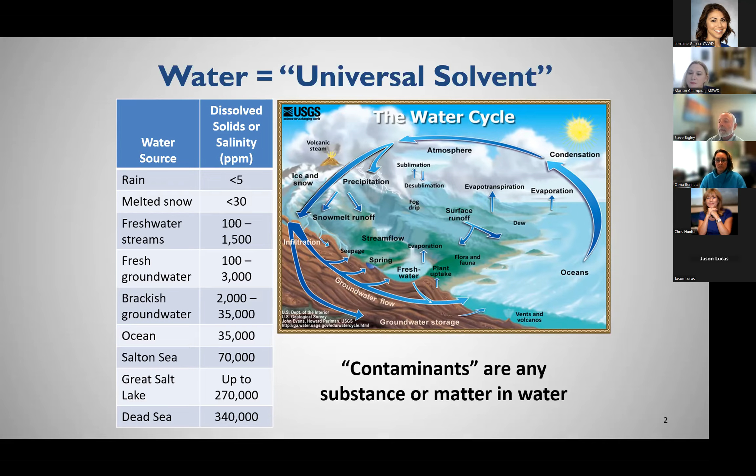I'm happy to report that our tap water is primarily H2O, 99.97%. That little sliver represents all of the things dissolved in H2O, and it's typically minerals like calcium, magnesium, sodium, potassium. But we hear a lot about that part which represents about 1 10,000th of 1% of the water, which is those things in the news like arsenic, lead and copper. So we're going to talk a lot about those things.

In order to ensure our water is safe, we have lots of tools, and from doing research like that we do in our own state certified laboratory, there's a photo there to the right.

Lots of contaminant monitoring. How do we protect those sources that we use for drinking water? State and federal regulations are that key way of measuring and ensuring consumer confidence that we are providing safe water. We implement water treatment when necessary. We do surveys to ensure the safety of the water and the water system exists. How we construct the water system also helps protect and preserve safe water quality.

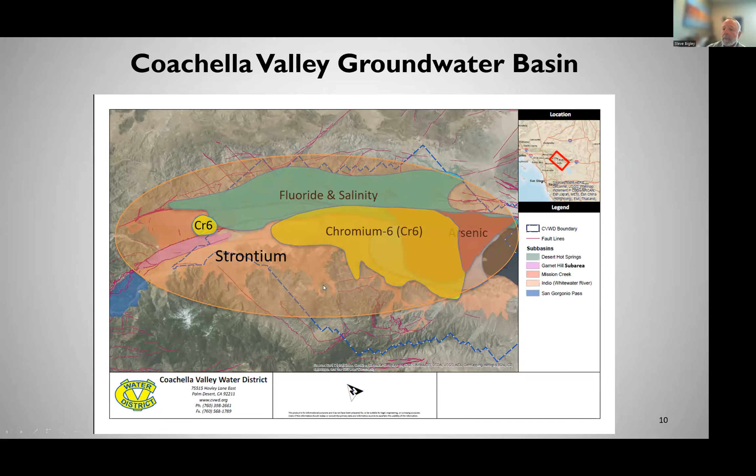So let's take a look at the chromium. It really serves as a good example for the state process for drinking water regulations. Chromium is abundant. It's the 21st most abundant element in the Earth's crust.

It occurs in two oxidation states. Chromium-3, you typically find that in more solid forms. It can also be dissolved in water, and chromium-6. It just has to do with the number of electrons, and it can move back and forth between them depending on the type of environment. If you're in a reducing environment, antioxidants, you'll have a chromium-3 version. If you're in an oxidizing environment, you'll have chromium-6. In groundwater, we find it not just in our area but throughout the state - it primarily occurs as chromium-6.

Chromium-3 is an essential nutrient. It's in your vitamins. We use it to produce insulin, regulate our metabolisms.

So the sources - natural deposits. Those fault systems, again, very important. Where do you find the geology that has higher concentrations of naturally occurring chromium? Along the margins of faults. So we have a really big margin, it cuts right down the middle of the valley. We have these natural minerals that have chromium.

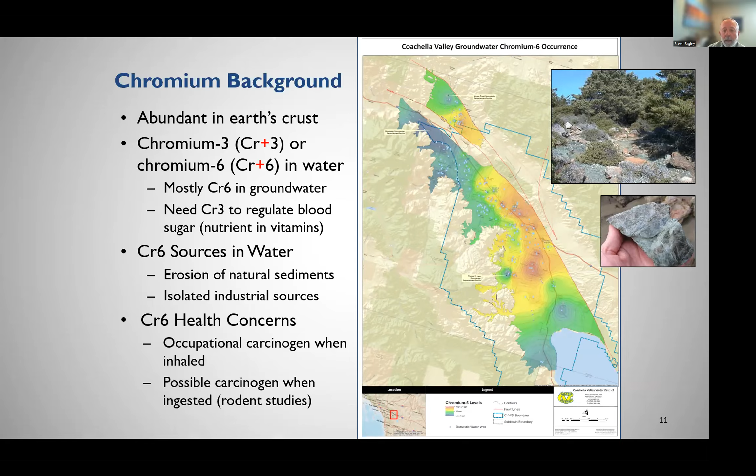We've known a lot about chromium-6 from inhalation. A lot of occupational exposures were studied early in the 70s for people working in chromium ore facilities. We knew it's not healthy to inhale, but when it enters our digestive system, it goes through our stomach, which is a great reducing environment. We're designed to reduce chromium-6 to chromium-3 because we need it. So it was never a concern from ingestion until some rodent studies came up.

So it's actually surprising that they saw no increased mortality in the rodents, both rats and mice, that were used in these studies. But they did see an increased number of tumors that formed in the small intestine.

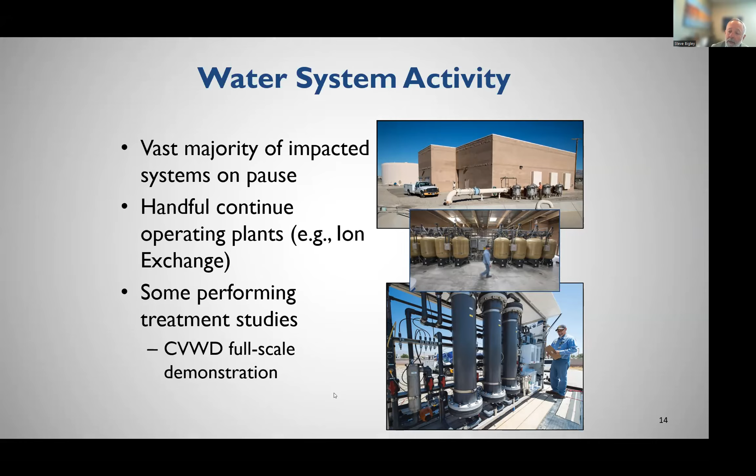So we were on track to move forward with that project when the state withdrew their standard, but we didn't stop looking for a better way. So we continued with our state certified laboratory doing treatment studies. There's an example to the right, ultimately landing on a better option.

We did work on using a very well-known antioxidant or reductant, vitamin C. We did a lot of work on vitamin C. It works well for an in-home product. You can easily add 200 milligrams of powdered vitamin C to a gallon, and you'll immediately reduce the chromium-6 level in that gallon of water. But it wouldn't work out in our water system.

But we did identify another common antioxidant that's already an approved drinking water additive. It's used to protect pipes, and that's called stannous chloride. And we did lots of testing in our lab, a much better reducing agent than iron and vitamin C.

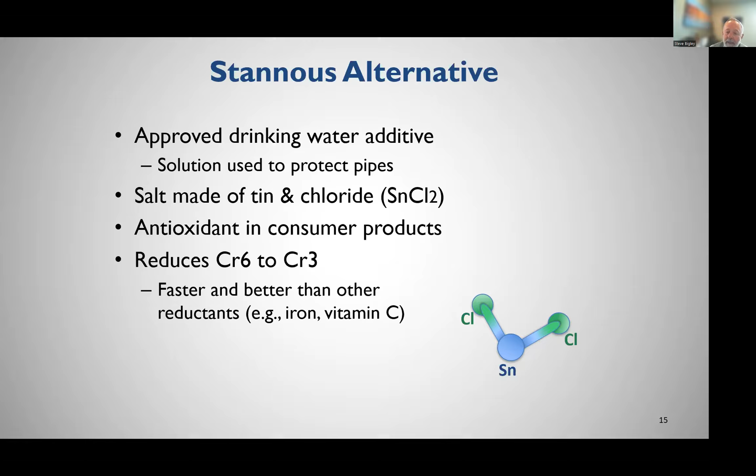And we ultimately developed a full-scale demonstration treating an entire water system, the one north of the San Andreas Fault that we serve, about 3,000 homes along the Dillon Road, if you're familiar with that area, the Sky Valley, Indio Hills area. And it was an ideal system because it's about 15 miles long, and the wells are all located on the far northern side.

And so it provides a long time to test the reaction and ensure whether or not this would work in a water system. And it had good amounts of chromium-6 so that if we could demonstrate it in this system, it would meet all of the other wells that we have that might need treatment.

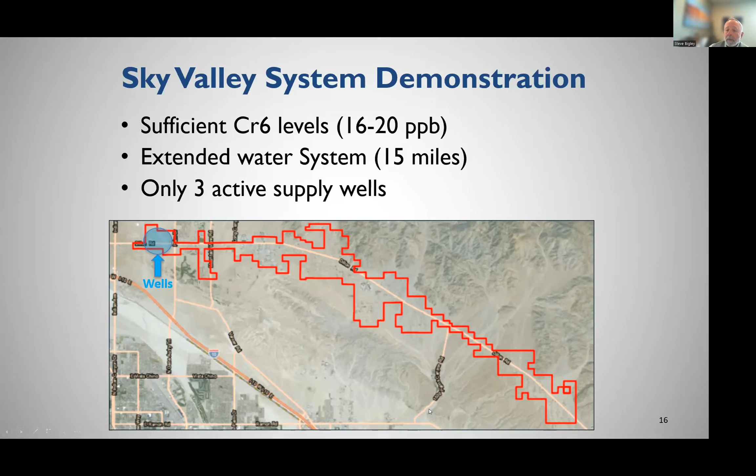So it's really simple. We add about half of one part per million of stannous chloride solution. You get an immediate reduction of chromium-6 to chromium-3. Remember, chromium-3 is that essential nutrient. And then we add about the same amount that we've always added of chlorine, about half a part per million of chlorine.

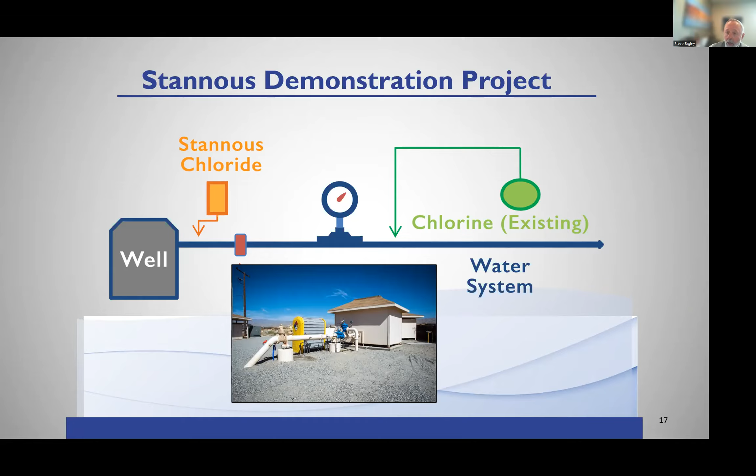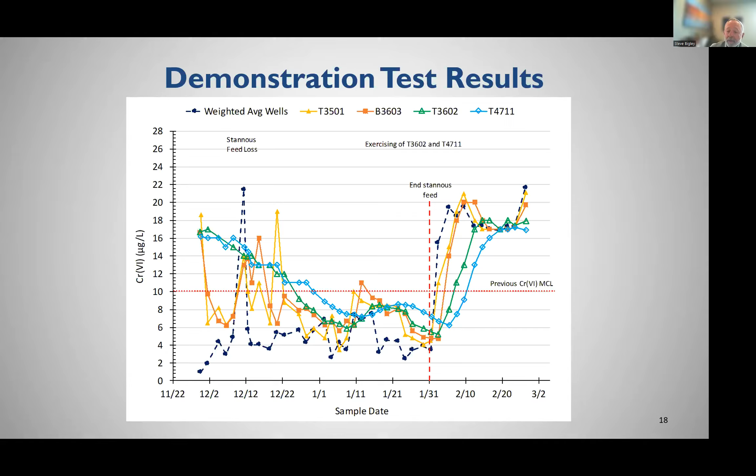The benefits: it's much more cost effective, and it doesn't produce any waste products. Those hazardous materials that are developed have environmental concerns, but there are none of those here. There's no visual impact at these well sites, which are often in our neighborhoods, and that's very important. It also helps protect pipes, since it's an approved drinking water additive. In areas that have lead problems, we don't have one here, but it would prevent lead from leaching into the water, so that's an additional protection. And it didn't change the taste, smell, or look of the water, so it was a real success.

We have submitted our application to the state. They have it to allow us to implement this. We'll start in the same water system where we did the demonstration, and then move over to our large water system. Of course, all this is hinged on what the state comes out with as far as that drinking water standard. So I just wanted to give you that one example, and I'm certainly available to answer any questions you might have.

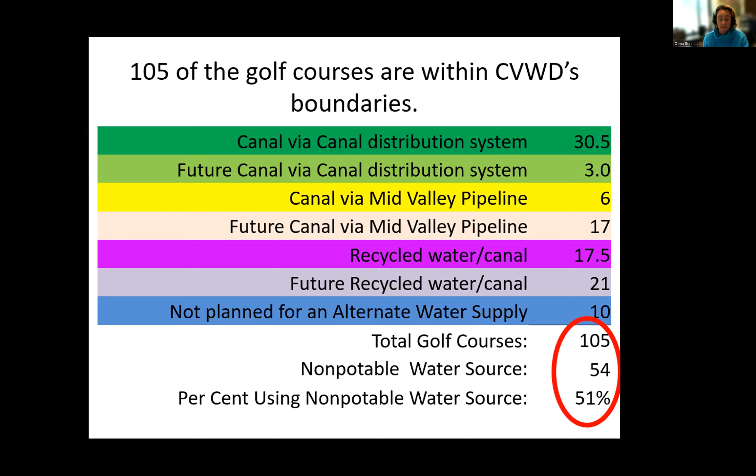I know you know this, and any other time of year I'd say we don't get much stormwater, but we had sprinkles today. Typically we have 3 to 4 inches of rain here in the desert, so we can't rely on stormwater for irrigation, not only on golf courses but even in our own yards. As we know, the other water source could be groundwater—a well owner would pump groundwater from the ground and apply it to their golf course or property. The third source would be non-potable water.

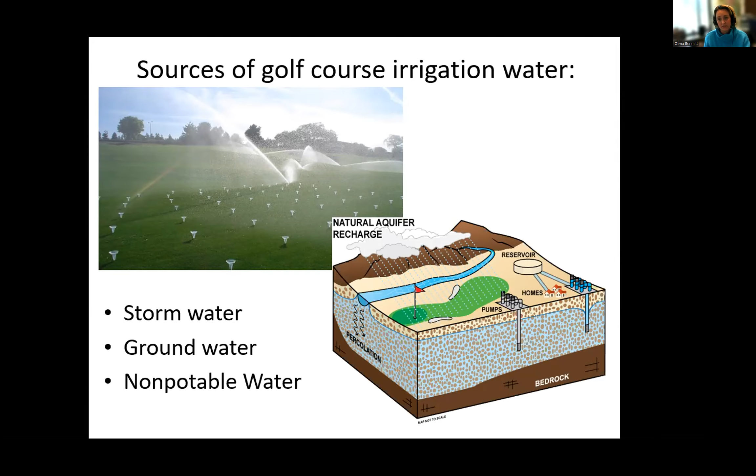So how much water—I always get asked how much water a golf course actually uses. It really depends on where they're located and the type of golf course it is. This is an evapotranspiration map, available on our website, cvwd.org, and you can see there are 5 different zones in the valley. If you're a golf course in zone 1 or 2, you might only use 300 to 500 acre feet a year for irrigation. But if you're out in the wind belts, like zones 5 or 4, you're going to use quite a bit more, maybe 1,400 acre feet per year.

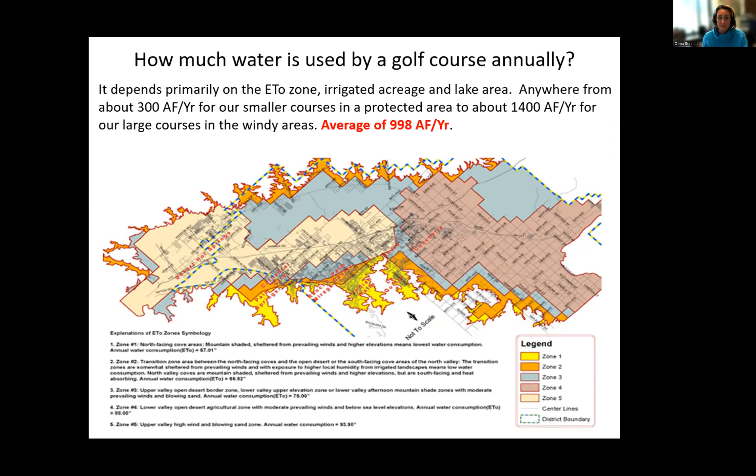The average last year for all of our golf courses was 998 acre feet—that was the average for the 105 in our service area. So to make the math easy, we'll say that's an even 1,000 acre feet a year for a golf course. Because there are 120 golf courses in the valley, that means potentially 120,000 acre feet of well water could be pumped from the ground, but with the non-potable program, that doesn't happen.

What's the big deal? Well, the whole point of this is to preserve our groundwater, because in the past we've been in an overdraft situation, meaning we're pumping out more water than what's being replaced.

We work with the USGS, and we've been working with them since '96. This graphic on the right is showing uplift and subsidence, and where it's red, that's areas of up to 1.4 feet of subsidence.

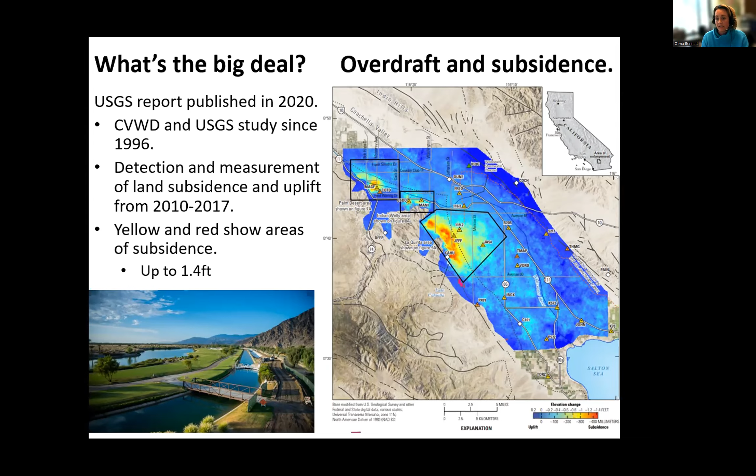What is in those red spots? You might be tempted to say golf courses because we're talking about golf courses, but really that's where most of us live. That's where our businesses are, that's where we work, resorts, restaurants, shopping—everything is mostly in those areas, so we see a big hit on those areas.

The district's been replenishing the groundwater since the late 60s. When we replenish the aquifer, we bring imported water in and put it into a pond and it percolates down. That makes the water available for pump well owners, whether it's a golf course or even the district ourselves.

On the other hand, an opportunity for us is to do in-lieu recharge. We have 38 golf courses that are in line for in-lieu recharge, and that's when we substitute the groundwater use with non-potable water use.

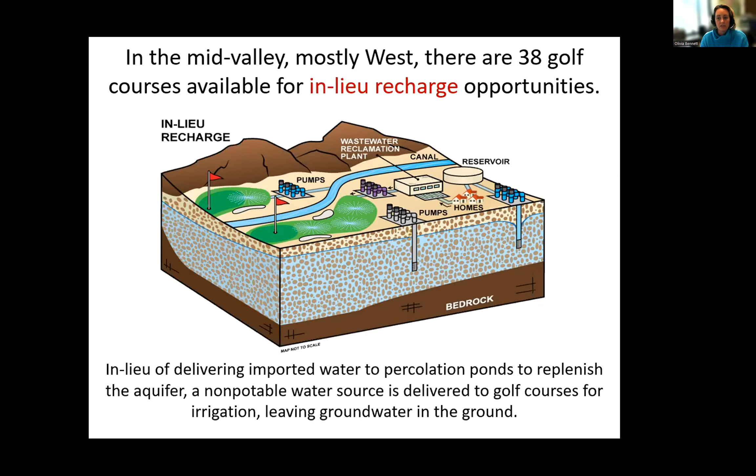This icon is showing when we pull water off of the canal and pump it to a golf course, or we may collect wastewater from homes, treat it, clean it and disinfect it, and then provide it to a golf course for irrigation. You'll notice those golf course owners' wells are off, they're grayed out, and that's the goal.

It's one of the goals of our water management plan. The water management plan was developed to prove that we're going to be able to meet our current and future demands and have sustainable water sources.

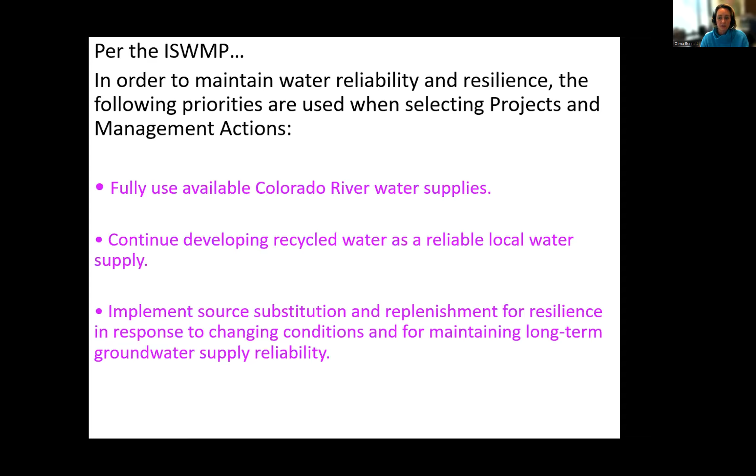As it pertains to non-potable water, we said in the water management plan that we're going to fully use available Colorado River water supplies, continue developing recycled water as a reliable local water supply, and implement source substitution programs—basically where instead of groundwater, we're going to provide non-potable water. And of course, water use efficiency across all sectors is important.

Strictly pertaining to golf courses, they're to focus on conservation and utilizing non-potable water for their irrigation source in that plan. The golf courses were aware of this and they wanted to participate.

In 2013, they approached CVWD and wanted to develop a task force, the Golf and Water Task Force, and we worked with them to develop a mission statement. In that mission statement, they addressed that they want to institute some conservation measures and expedite the use of non-potable water. So they are on board with the non-potable water program, aware of the water management plan, and they do want to participate in it.

I've said non-potable water several times, but now I'm going to tell you exactly what I'm talking about. The first type is canal water or Colorado River water, and a golf course would have access to canal water via the Mid-Valley pipeline or directly off of the Coachella branch of the All-American Canal, or from the canal water distribution system. The second type is recycled water.

We provide disinfected tertiary recycled water from our treatment plants to golf courses and for landscape and golf course irrigation. It's important to know that there are potable water sources and non-potable water sources, and we want to use potable water for potable reasons and non-potable water for non-potable reasons. That way, the primary source of water isn't groundwater—it can be non-potable water instead.

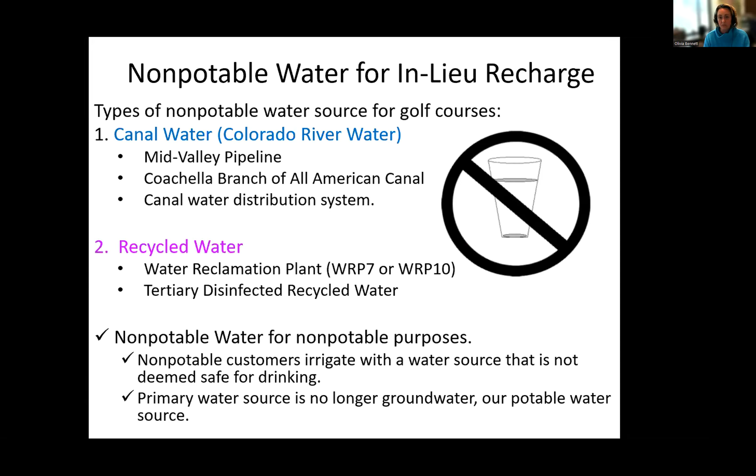So how are we doing?

In the East Valley, for our canal water connections last year in 2022, about 21,000 acre feet of water was used for golf course irrigation, which was 74% of their total irrigation demand. Our goal to have all 33 golf courses in the East Valley connected would be 33,000 acre feet a year or so. We've got 3 more golf courses to connect out there, and a little bit of improvement to do.

However, in the Mid-Valley area for non-potable connections, remember those purple courses from that aerial map, last year it was over 24,000 acre feet, which was 93% of their total irrigation demand. Our goal, because there are so many more golf courses to connect in the Mid-Valley, would be up to 61,000 acre feet per year. So our goal, and what we require for a non-potable water golf course to meet, is 80% of their total annual or fiscal year's irrigation demand with non-potable water.

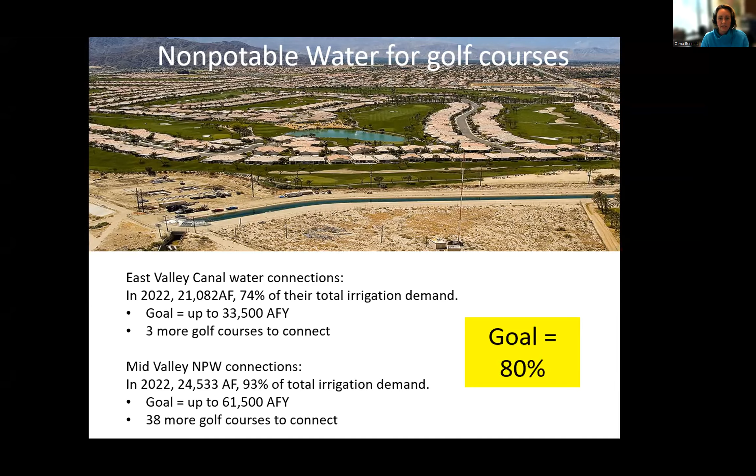So if you add those two numbers or percentages together, it's about 83 or 84%. So across the board, they're meeting the goals.

For canal water, I think you've probably covered this, but just wanted to give you an idea where it actually comes from. This is an aerial of Southern California. Over on the left would be the ocean, and on the right would be Arizona. Between us and Arizona is the Colorado River, the blue squiggly line going all the way down. Off of the Colorado River at the bottom is the All-American Canal in blue going left to right, and shooting straight up off of that is the Coachella Canal, the Coachella branch of the All-American Canal. It's 123 miles long, and as you see, it kind of fish hooks there towards the end, and it terminates at Lake Cahuilla.

Well, within that fish hooked area, we have 1,300 customers, and 30 of them are golf courses.

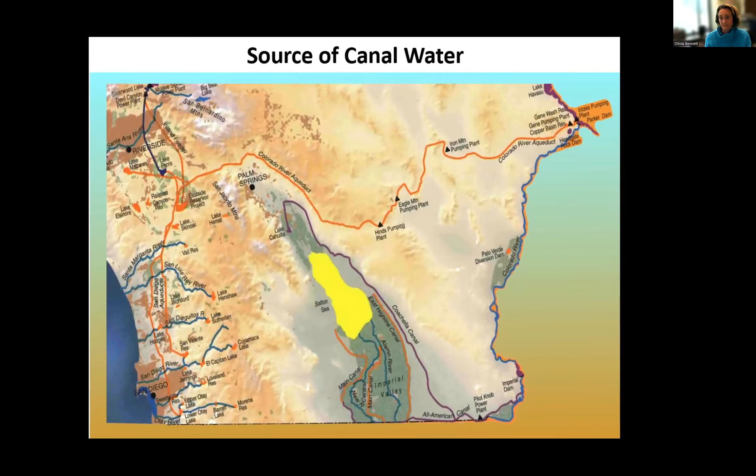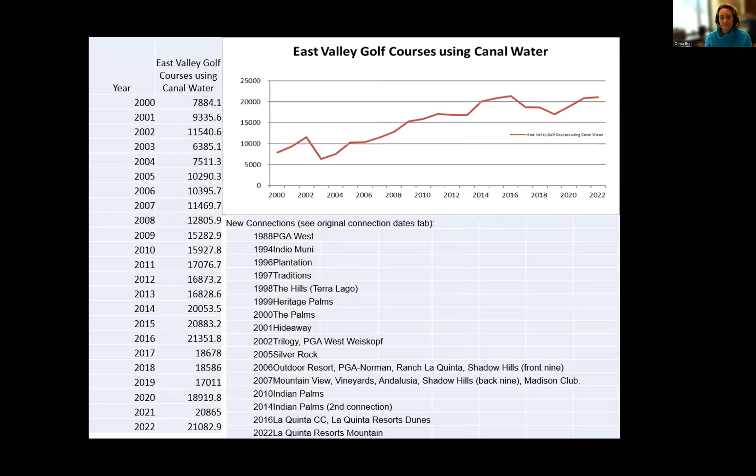The next water type is recycled water. CVWD has been in the recycled water business since 1968. When we took over the domestic water system serving Palm Desert Country Club, they had a package plant there that was treating wastewater to secondary effluent, and they were using that to irrigate the golf course there. So when we inherited the domestic water system, we inherited the wastewater treatment plant, and CVWD was in the sanitation business. Today we have 2 wastewater treatment plants that provide disinfected tertiary recycled water to golf courses and for landscape irrigation as well.

What is recycled water? It's municipal wastewater that's collected from homes and businesses and receives a high level of treatment at a water reclamation plant. We monitor those plants 24/7, and we collect water quality samples all day long. In fact, every day, every week, every month, every quarter, every year, we're collecting different types of samples to be tested to ensure that our permit regulations are met and that we can provide safe recycled water to our customers.

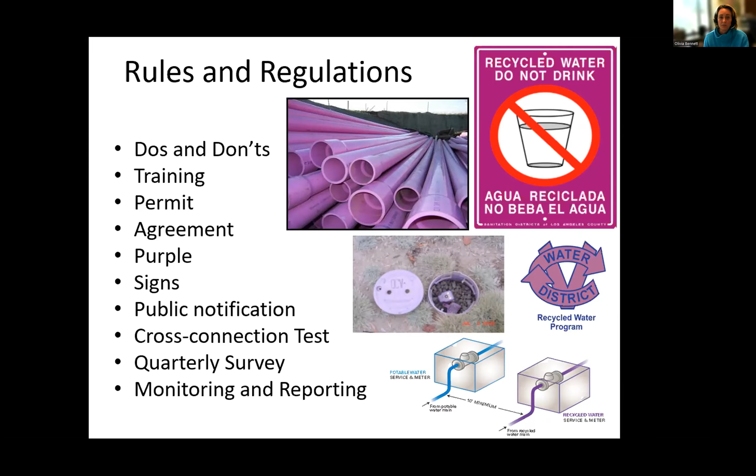And to prove that it's not connected to the domestic water system, we conduct cross-connection shutdown tests every 4 years. That's to make sure there isn't going to be any connection between the two water sources, so that it's not unsafe. We always go back every quarter — we're required to do quarterly surveys to make sure there's been no changes on the irrigation system. And then that monitoring, and other monitoring, we are required to report to the state what our findings are. It's a highly regulated water source, as Steve mentioned.

In the state of California, there are 43 allowed uses of recycled water that are approved, and I'm going to show you something here in a minute. I don't know if you have a printout of it or not, but we can get you one. There's a lot of uses listed on the left-hand side, and then the different levels of recycled water treatment. Remember, CVWD provides disinfected tertiary recycled water, and it's approved for pretty much every use that's listed there.

A couple of years ago, they did a survey of the state. They always update this survey, and they found that for the most part, the majority of recycled water is being used for in-stream flows. That's where we put water in the streams to make sure they can be used for recreation, or for plants and animals ecologically — their homes — and make sure they're safe for spawning or migrations and things like that.

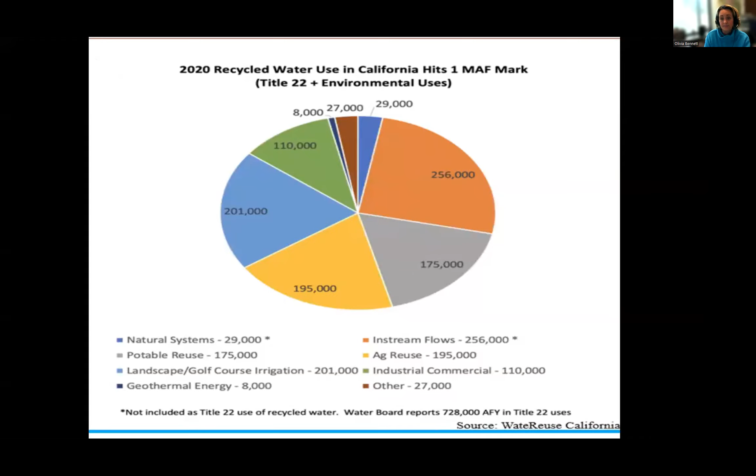The second highest use is golf course and landscape irrigation, and the third is agriculture. But at CVWD, we provide recycled water for golf courses, HOAs, and high school athletic fields. Even our buildings here at CVWD, the landscape around them uses recycled water. And in the near future, we do intend to provide recycled water for agriculture.

10 reasons why we provide recycled water here in the Coachella Valley: the Department of Water Resources projects a large statewide shortage, and groundwater is our drinking water source. We want to protect that. If the state comes in and doesn't believe that we're following our plan, they could adjudicate our groundwater system and put high regulations on what's allowed to be pulled out and what's not.

But as we mentioned before, in our water management plan, we said that we're going to provide recycled water because it's a reliable local water supply for irrigation. If we irrigate with recycled water, it saves groundwater. We want to prevent future overdraft of our groundwater, and that's what the in-lieu recharge program is about.

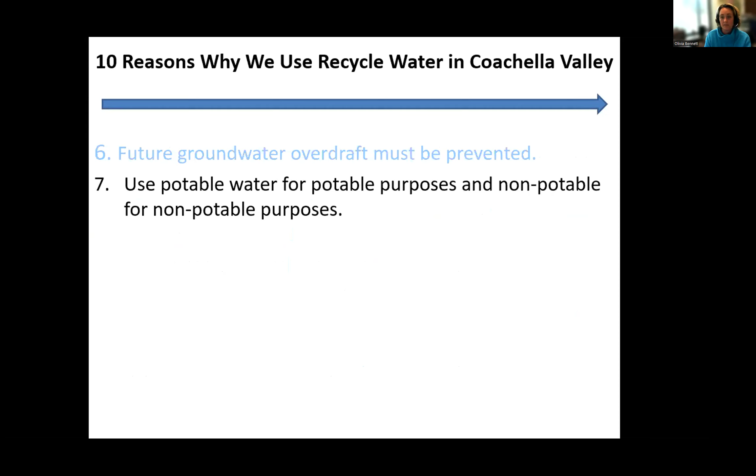Again, the idea is to use potable water sources for potable purposes and non-potable water sources for non-potable purposes. As you saw, there are 43 approved uses, and pretty much any non-potable water use can be served with tertiary recycled water. It's more economical than advanced treatment. There are areas in California treating recycled water to potable standards, but if we were to convert our treatment plant to that, it would cost millions and millions of dollars — so much more than what we are paying now to connect the golf courses, which are large end users and use a lot of recycled water.

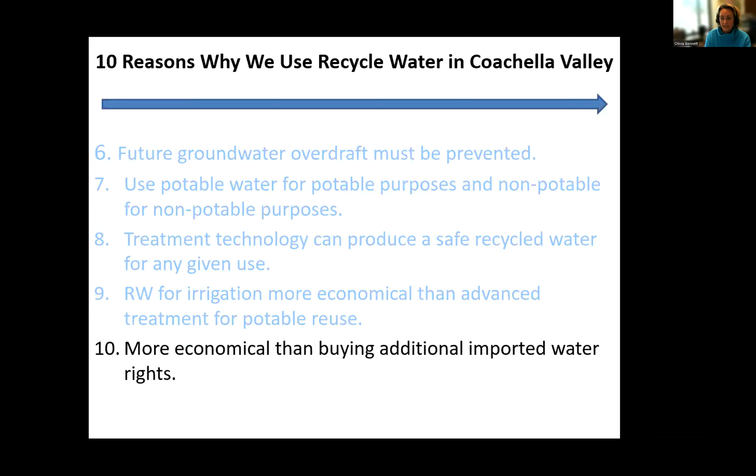It's more economical than buying additional imported water rights because those rates are very high right now. The problem with recycled water is that we run out. In the winter, there are a lot of snowbirds in the valley flushing their toilets, and a golf course's irrigation demand goes down. Then vice versa, in the summer, irrigation demand is high, but there aren't a lot of people here.

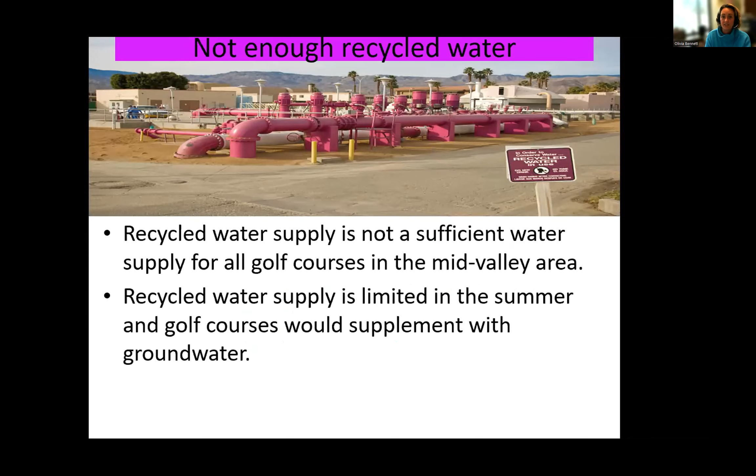So what we did was build the Mid-Valley Pipeline, and that supplements our recycled water supply with canal water. The Mid-Valley Pipeline is a 54-inch pipeline that's in the stormwater channel and brings canal water from Indio through La Quinta, through Indian Wells to Palm Desert. It's about 6.7 miles long, and it supplements our recycled water supply.

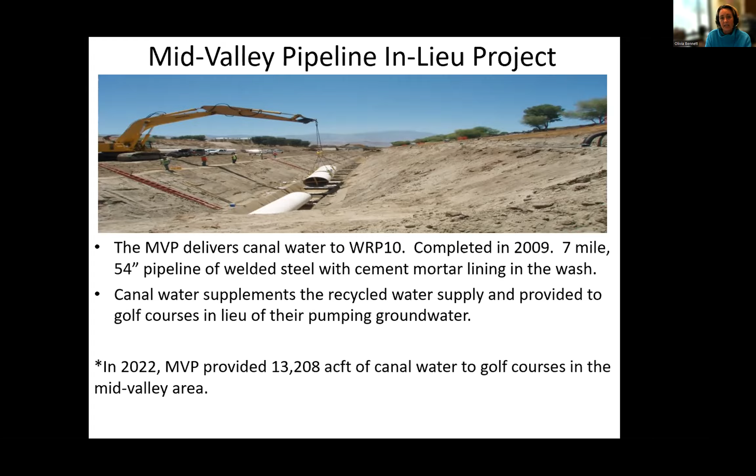Last year, it provided about 13,000 acre feet of canal water for golf courses in the Mid-Valley area, and we have a Palm Desert groundwater replenishment facility here in Palm Desert as well, and about 11,000 acre feet were replenished with the Mid-Valley Pipeline water.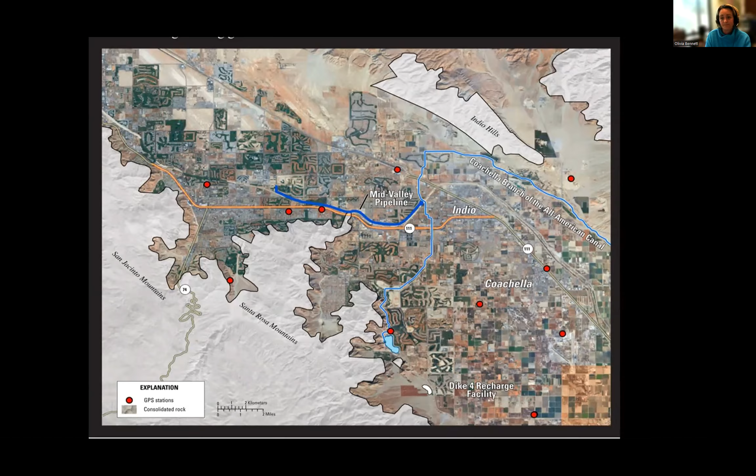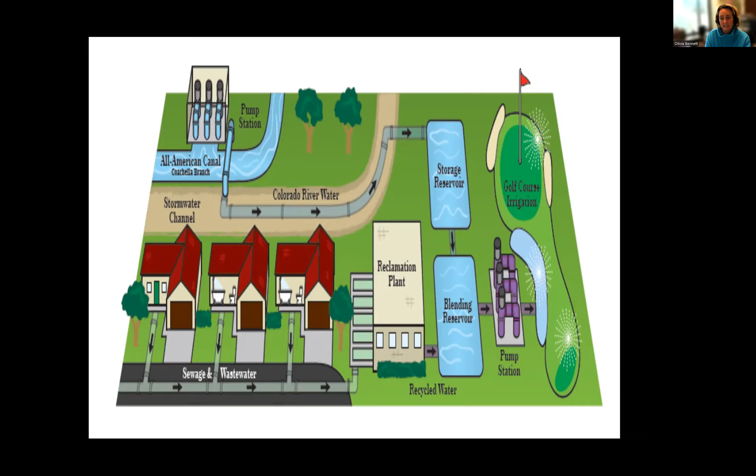This is a schematic that I like as well. It gives you a better visual of what's happening, in that we have a pump station that pulls canal water off of the Coachella branch of the All-American Canal. It's pumping into a pipeline in the stormwater channel up to our water reclamation plant number 10 to a storage reservoir. Meanwhile, we're collecting the sanitation or wastewater from homes and businesses, taking it to our water reclamation plant, treating it, cleaning it, disinfecting it, and putting it in a reservoir where we could blend with canal water and then send that out to our golf courses or our customers.

We've been doing recycled water in the valley. Remember, I mentioned the first one was Palm Desert Country Club since 1968, and we've been connecting golf courses ever since then. You can see the water use has gone up.

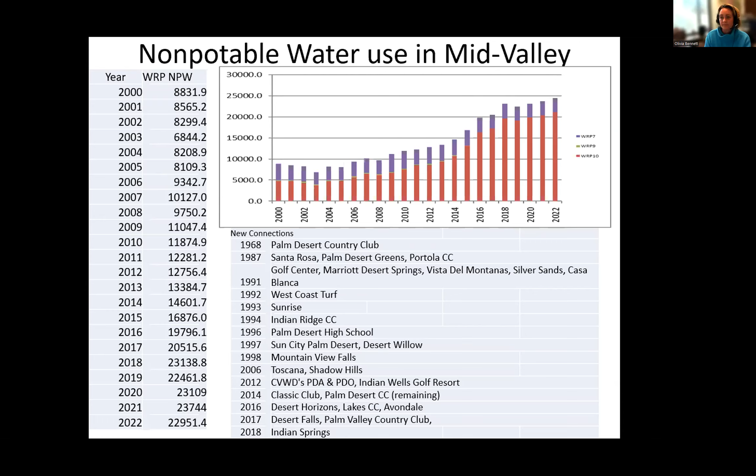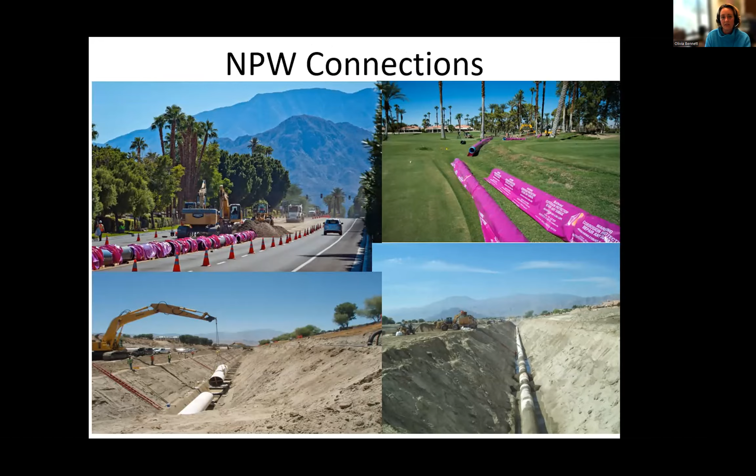This is just a picture of construction going on. As I mentioned, all the pipes have to be purple, but some pipe material doesn't come in purple, so they have to put it in sleeves of purple plastic before they put it in the ground so that there's no potential cross connection. The bottom two pictures are again of the Mid-Valley Pipeline when it was put into place in 2009.

This map shows the non-potable water master plan implementation schedule. Here, if you look at the dark orange with a brown outline, those are the four golf courses that are going to be connected later this year. That was the work being done on Hovley Lane. All of the work on the golf course itself and on Hovley Lane is going to be done soon. We are in the process of constructing another pumping station so that we can serve them, as well as the ones shown in orange with a lighter brown outline, which we're going to focus on next.

As I mentioned, we're going to go down Frank Sinatra, and those golf courses—it might be a little blurry, but it's Annenberg, Tamarisk, Rancho Mirage Country Club, and Suncrest. We're going to go across the 10. We've already got Classic Club connected, that's what's highlighted in green across, north of the I-10. But we're going to reach Tri-Palms and Jack Ivey Ranch, as well as coming down Warner Trail.

Direct your attention back over to the right lower. That's where the Indian Wells Tennis Garden and the Southwest Community Church and Palm Royale are.

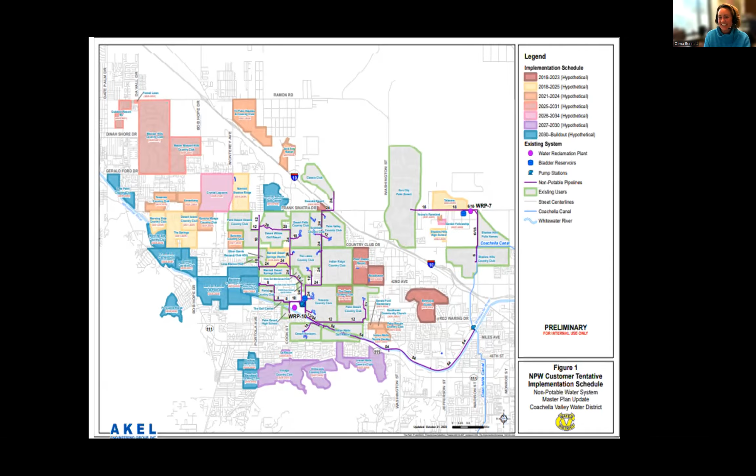That's what I usually use.

So here's where the math comes into play that I mentioned earlier. If a golf course is using 1,000 acre feet of water per year, and we have 120 golf courses, that's 120,000 acre feet a year that they could be pulling from our groundwater. However, because we have 30 golf courses in the East Valley and soon to be 3 more, and all of the golf courses in the Mid Valley to be connected. And by the way, Desert Water Agency in their service area serves 6 golf courses with recycled water.

So if we're subtracting from 120,000, get all of these golf courses on non-potable water, we could get down to 19,000 acre feet per year, which is quite a reduction of the impact to the groundwater.

And that's all I have. Thank you for listening. Wow, that was some good information. We've definitely got some questions for you.

And the first one is from Carlos. He's asking about the non-potable water: if it was not used for golf courses, where would it be re-injected into the aquifer? Well, we're not injecting into the aquifer, but we do have... let's see, should I close out of this? Will I be fine? Sure. Okay.